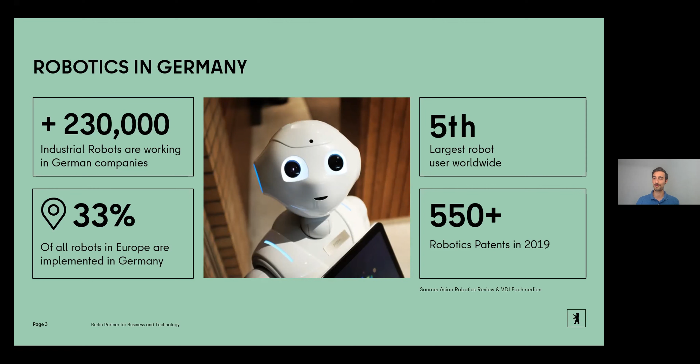So now I come to robotics in Berlin. We have three main topics addressed by the local actors: industrial robotics and automation, the care industry, and we are very strong in software and machine learning. Overall, there are around 60 robotic companies in Berlin, real robotic companies, and this number excludes all sensor providers or companies that produce parts for robotic companies.

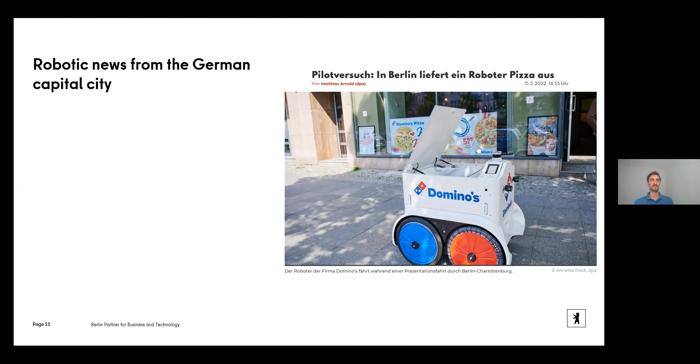So this is my last slide. I want to end with some news from the capital region in Berlin. This is a cooperation between Domino's and a Berlin company called Teraki. They started delivering pizza with a robot. And another one, this is the cleaning agency of Berlin. They plan to use robots to clean parks.

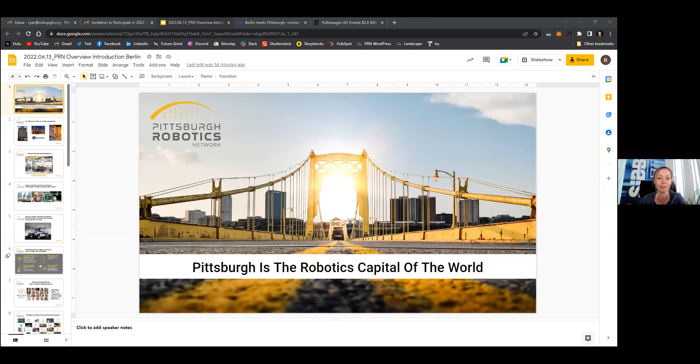Thank you, Jens, very much for this introduction to the ecosystem in Berlin. And now, to have a real conversation, we will invite Pittsburgh to make a similar or parallel presentation about the ecosystem in Pittsburgh. I read somewhere that Pittsburgh has a mission to be the global capital of robotics. So Ryan, can you tell us a bit more about this mission and how you want to achieve it? Ryan O'Shea from Pittsburgh Robotics Network, please go ahead.

Great. Thank you for the introduction. As was said, I am Ryan O'Shea. I'm the Communications and Engagement Manager for the Pittsburgh Robotics Network. We are a nonprofit organization that represents the interests of the robotics companies here in Pittsburgh, helping them commercialize their products, make connections around the country and around the world, and encourage companies outside of the Pittsburgh area to come here to see what's going on, to partner, invest and work here. There's so much to see about the Pittsburgh robotics ecosystem, and that's what I'll get into now.

See if I can advance here. All right, so just a quick background about why Pittsburgh. Pittsburgh has long been an industrial city, and it's long been a world-changing city. The first settlers from Europe came here in the mid to late 1700s because of the coal in the region. That eventually gave birth to the steel industry, which is what Pittsburgh was known for, the steel capital of the world. That industry was largely led by Andrew Carnegie, a Scottish immigrant who came to Pittsburgh and built one of the largest companies in the world here. And the steel made in Pittsburgh built buildings across America and around the world.

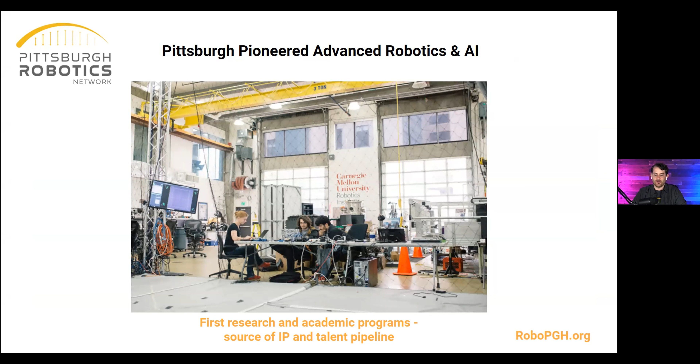And it didn't take long until that really was put into effect. 1979 was the Three Mile Island nuclear accident here in Pennsylvania, not far from Pittsburgh. And this is the birth of field robotics, when some of the students at Carnegie Mellon University used the robots that they were developing to clean up the waste and the accidents from this nuclear incident. So this was showing how robots can replace situations, keeping us safe and taking care of problems. That's something that's continuing till this day.

And Pittsburgh's no longer this great secret when it comes to robotics. This is what we are known for. We've grown from a steel city to a healthcare city, and now we are known as a robotics and AI city. And I think that's going to continue for quite a while. We have the infrastructure here. We have the foundations. We have the support from the work that's been done in the past, and that is driving industry forward today. We not only have the academic work that's happening at Carnegie Mellon University, the University of Pittsburgh, and other institutions in the area, but we have the commercialization. We are creating that pipeline from research and development to technology to the market.

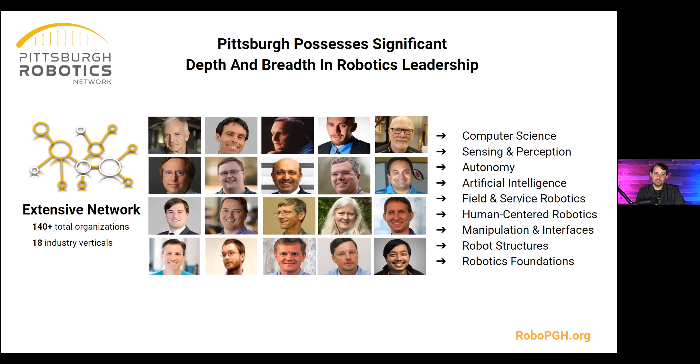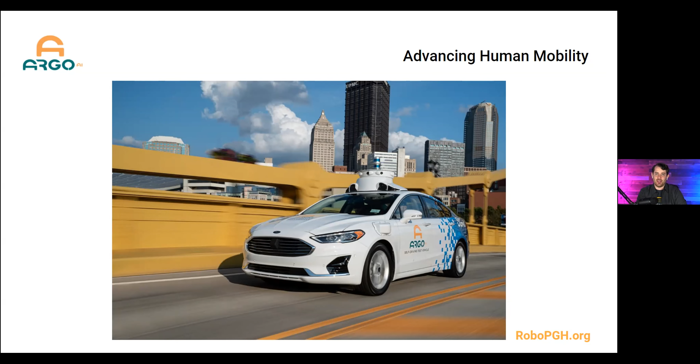And of course, autonomous vehicles are something that Pittsburgh is now associated with. This is Argo AI, a company founded by Bryan Salesky of Carnegie Mellon University, a world-leading self-driving company. And of course, they have a connection to Germany as well. Volkswagen has invested $2.6 billion into Argo AI in 2019. I believe this was $1 billion in money, and then 1.6 billion was the valuation of Volkswagen's autonomous vehicle center, with Argo AI's European headquarters. So this is some of the collaboration that we already see between Pittsburgh and German robotics companies.

And of course, they are on the streets testing there as well, just as they are in the United States. So I'll very quickly go through this because I know I'm short on time here, but some of the industries that Pittsburgh Robotics are working in are the supply chain, checking out retail inventory, palletizing and depalletizing. We are working with the supply chain overall in terms of logistics, getting things to where they need to go.

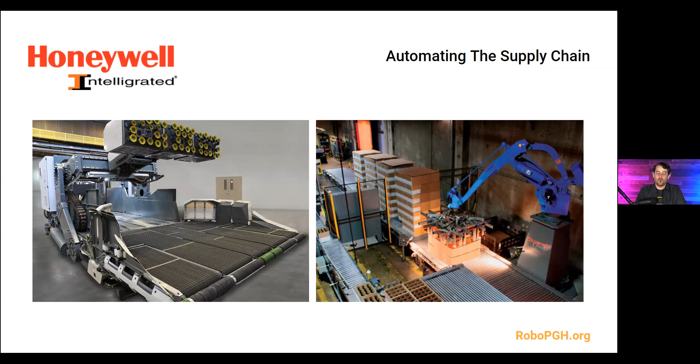FedEx Ground is headquartered here in Pittsburgh and is very interested in the robotics companies that are here who are pioneering in this space. Again, some more of that supply chain work with IAM Robotics. Astrobotic, again, is going to the moon. RE Squared Robotics was recently acquired in a $100 million deal by Sarcos. They make advanced robotic manipulators, so robotic arms, for many different applications.

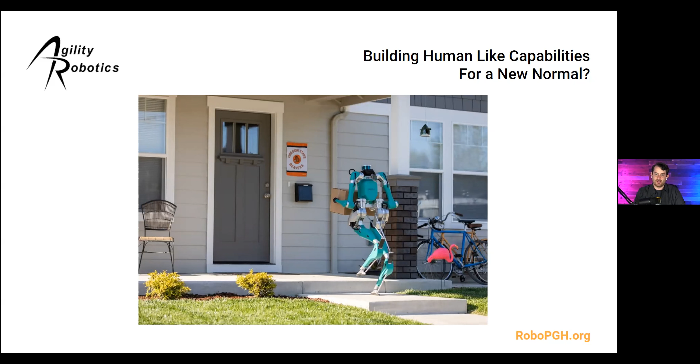And Agility Robotics, which makes a bipedal walking humanoid robot for warehouse and delivery here in Pittsburgh. What used to be steel mills are now robotics manufacturing centers here in Pittsburgh. And Kaarta is mastering 3D imaging and digital twin technology, and they're really pioneering this. So there is a lot going on in Pittsburgh.

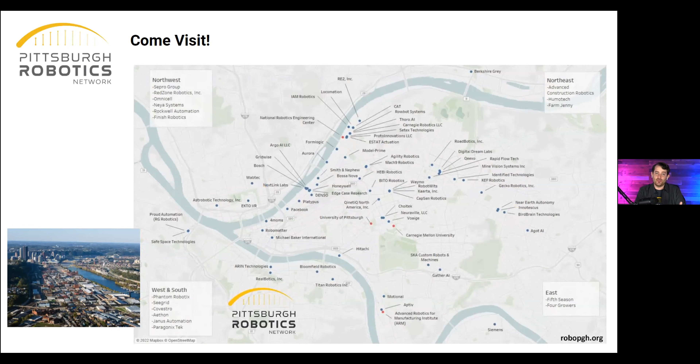I want this to be an invitation for you to come visit, see what's going on here. We have many robotics companies in densely packed areas, as you can see in this map, many of them in a very small 1 square mile area that people often call Robotics Row. This is all happening in Pittsburgh, and you should really come see it. We're happy to show you around. So thank you, and feel free to reach out with any questions.

Thank you very much. I'm sure there'll be a lot of discussion in the networking session and breakout rooms about the comparison and possibilities in Pittsburgh. And of course, in both ecosystems, very important partners and stakeholders of development of the robotic ecosystem are research institutes. And this time I would like to invite representatives who can tell us a bit how the development of robotics goes from the perspective of a research institute.

I'm sorry. I will give the floor to Matt Rosenberger from Advanced Robotics for Manufacturing.

All righty, thank you. It's great to hear from Jens and Ryan earlier. My only regret is that I wasn't part of the initial meeting with Berlin back in January, but very glad to be here now and to talk about what we're doing in Pittsburgh, and more on a national scope. So let me bring up my slides here.

Okay, so to give a bit of background about who the ARM Institute is, we are based in Pittsburgh, but what we're part of goes back a little further than our inception in 2017. We're part of an initiative that started in 2008, 2010, with a specific purpose to reshore and refortify US manufacturing. Our government partners, the DoD, Department of Commerce, Department of Energy, started to deploy institutes across the US to address manufacturing challenges in specific sectors and focuses.

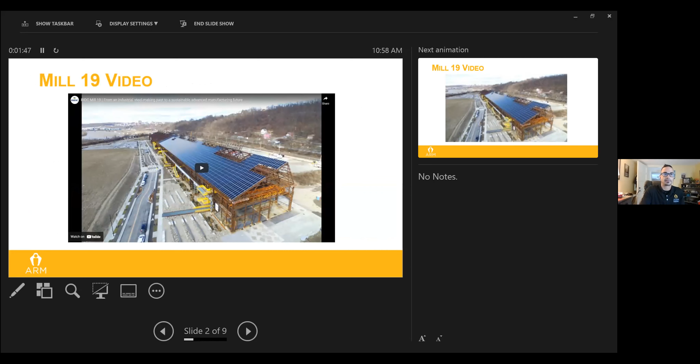Trying to share my audio here.

Scale and the size of the mill is something you just don't appreciate unless you're standing under it. And it's been here for almost 100 years, and it'll be here for another 100 years because that's the way we build stuff in Pittsburgh.

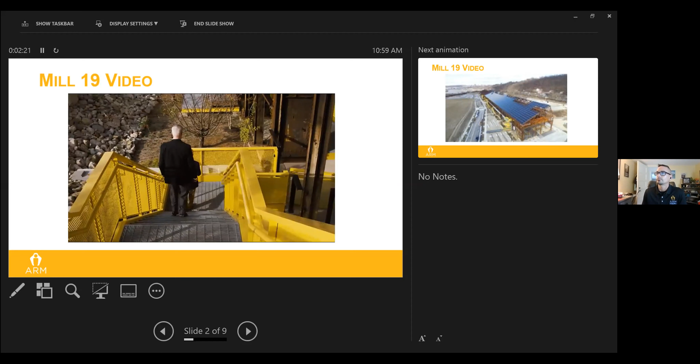Hazelwood Green is an amazing site, but it was a steel mill and a coke works, so there were environmental issues. They all had to be dealt with and resolved before you could go vertical with development. Here was this 1,500-foot long rusting metal structure that kind of was an eyesore, but also an icon. And so we were confronted with the challenge of how do we preserve the icon and turn it into something really positive on site.

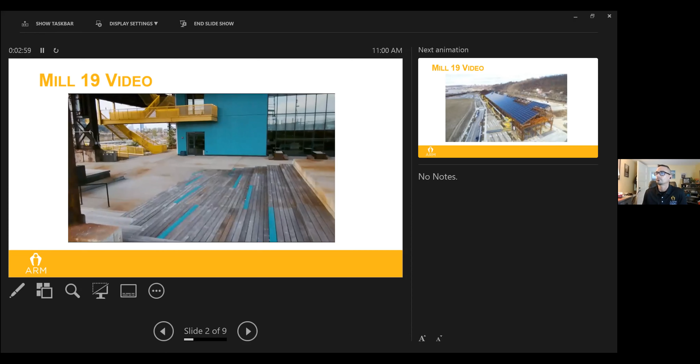MSR Architects out of Minneapolis, St. Paul provided an option that we didn't even think about, putting the buildings within the building, keeping the exoskeleton, and using that as a solar shed. The thought of putting solar panels across a quarter-mile long building, which is the largest sloped roof solar panel installation in the entire country, in and of itself presented a really tremendous opportunity for the foundation.

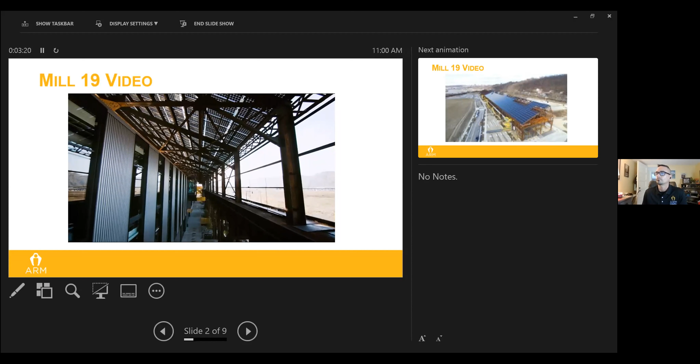It is generating power for the 2 buildings that are already built and will provide power to the 3rd building as well. All the stormwater from this site runs into a channel all along the length of the building. That water all flows into cisterns for gray water use.

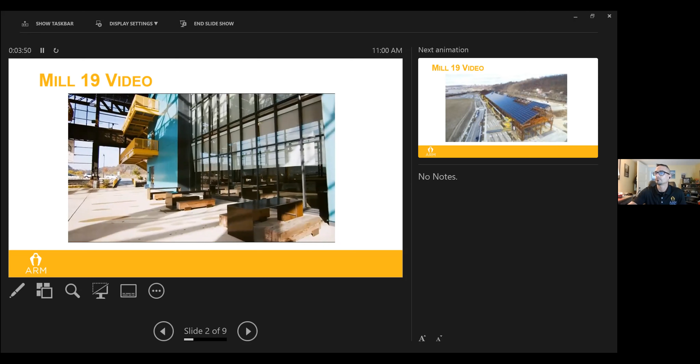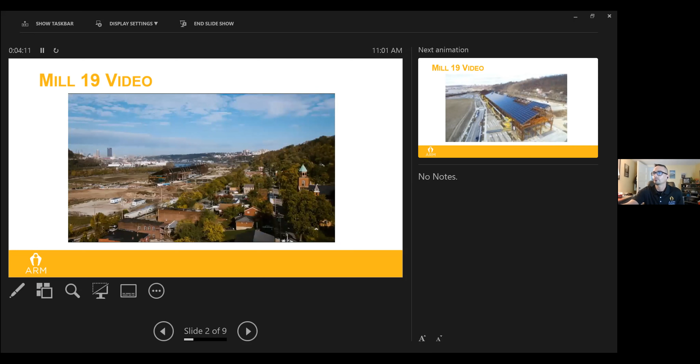One of our hallmarks is brownfield reclamation and redevelopment. Here in Hazelwood Green, Mill 19, we bring together the environmental remediation, the historic preservation, and the new cutting-edge companies and jobs. If you stand out here in an afternoon, you'll see the bald eagles swirling above the site. The resilience and rebuilding of Mill 19, integrated with the community, housing the new technology of the future, is really emblematic of Pittsburgh.

Okay, so that gives you an idea of our headquarters. We definitely invite you to, if you're in Pittsburgh, not only take the tour of the robotics scene, but also visit our Mill 19 headquarters. We share that space with Carnegie Mellon University, a local manufacturing extension partner called Catalyst Connection. And also, I think you saw in the video, our neighbors is a company called Motional, which is a Hyundai-owned autonomous car company.

So this particular site, there's a lot of development going on. There's commitments from University of Pittsburgh and the R.K. Mellon Foundation to put a BioForge Center, which would be a biomedical technology center. So again, expanding upon the industries, the healthcare industry, and also we're really trying to take the technology readiness levels from research to commercialization in one sort of setting in Pittsburgh.

Okay, so as I mentioned, we're part of this initiative called Manufacturing USA. It's now 16 institutes across the US. All of them have different focuses and scopes. There is a flexible hybrid electronics manufacturing institute, additives, lightweight materials, advanced composites, the list goes on. Most recently, there was a biomedical institute launching in San Antonio, Texas. That'll be the next institute coming from the Manufacturing USA.

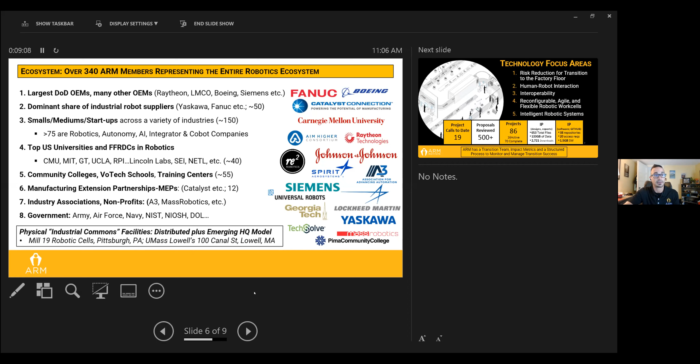And then certainly we have industry association partnerships like A3. We just attended recently the Automate 22 conference last week, and certainly government partners as well. Our technology focus areas, and we do call out 5 of them when we talk about conducting our project calls: risk reduction and safety to transition to the factory floor, human robot interaction, interoperability, reconfigurable, agile, flexible robotic work cells, and AI and intelligent robotic systems.

Those are our initial technology focus areas, although as time continues on and we are in our 5th year of operation, our priorities continue to change and we start to look more at AI and the intelligent systems and how they interact with the robots. We do conduct discovery workshops. We have working groups that we're launching this summer around some of the topics that we're talking about here, AI, human robot interaction, and more.

And the idea is to continue the conversation of those topics and create innovation, and really to help guide our project road mapping when we talk about funding opportunities. What do we continue to fund, and what industries and what challenges are out there that we can help address?

So as I mentioned, on the workforce side, we are doing a good bit of work. We've created a website called roboticscareer.org. We have also mapped out 26 competencies and job titles, including a robotic technician, an integrator, and a specialist. In that roboticscareer.org website, we've compiled over 14,000 programs nationally to help students find the right programs to get skilled in those different departments. We are adding different capabilities like job matching, where employers can pull from talent, as well as some AR, VR skill credentialing.

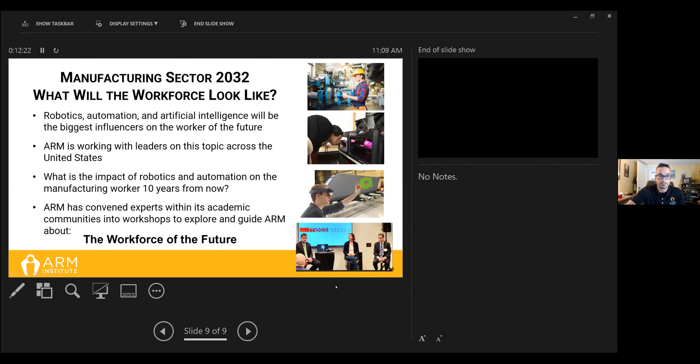If your company is interested in making an entry into the United States, or if you're already here, we would love to talk to you and see if we can be a resource for you in your journey for automation and robotics, as well as to connect you to our ecosystem of government and industry partners. All right, let me show that video real quick. And this one is about 2 minutes as well.

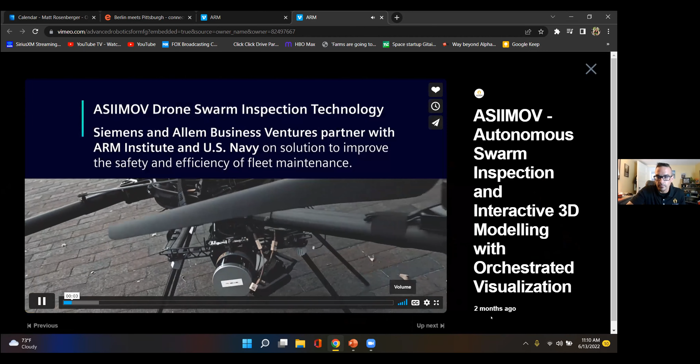Not getting any audio there. All right, I'm gonna have to skip that video because of lack of audio. Matt, we were getting the audio. Yeah, we hear you. Yeah, it was good with audio. Matt? Okay, maybe you can share it if you send the video to me. We could hear the audio. Maybe you wanna try again, Matt? Can you hear us? I'm sorry. Okay, yeah, go ahead. Yeah, so we could hear the audio from the film. Oh, you could? Okay, great. Let me try again. Okay. Alternatively, you can also share it with me later. But yeah, I think it's good to see it.

Perfect. Yeah, no, this will be a good demonstration of the type of projects that we're working with.

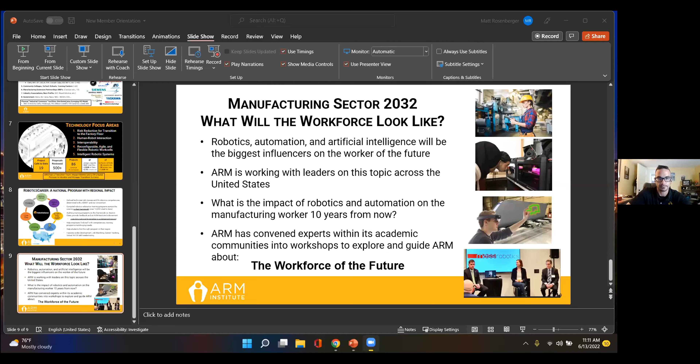Initially, we were looking at power plant inspections, long lines of piping and valves to where the drone can fly in, take immediate pictures and images, find if there's any leaks, and you don't want to get personnel into that area due to safety.

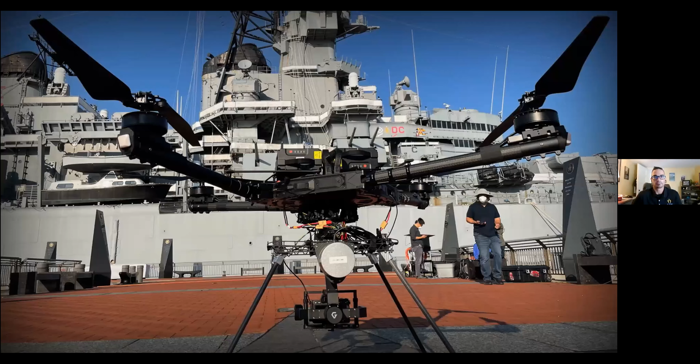The inspection would be autonomous. We put it in a shoebox, let's say, right? And we can fly outside of the shoebox. In an initial phase, we would assess what is this object inside the shoebox flying far away from the boundaries of the box. In a second stage, however, we need to get close. If we want to get high resolution imagery, we have to get really close.

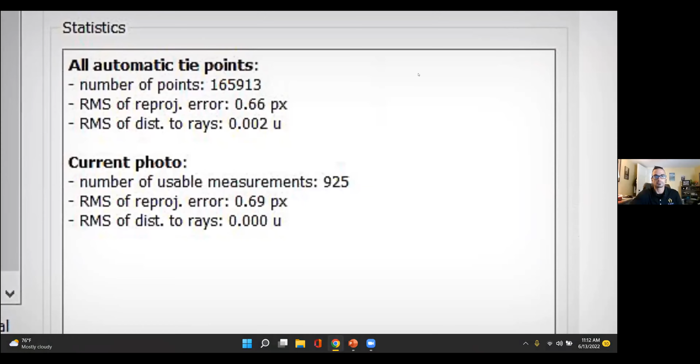Utilizing our modeling, simulation, and design software, we're able then to do a full check of the ship factory plant operation. ARM is focused specifically in robotics technology for manufacturing. So we're trying to make these processes more efficient and safer, as well as make sure that the DoD sustainment community is available in order to keep our country safe.

Working with ARM allows us to access startups and industry partners and academia. We're very excited about having this relationship. It's something that we've been part of for over 5 years, allowing us to do really impactful research, both for the industry and also for the Department of Defense. We're also looking at the industrial manufacturing capabilities that those technologies can produce, an advancement for the United States economy in the area of robotics and artificial intelligence.

My father served on the USS New Jersey in the Korean War. It's very interesting that I'm part of this particular project, giving back to our country in that capacity. The New Jersey still serves a role in our government in developing technology and serving our country.

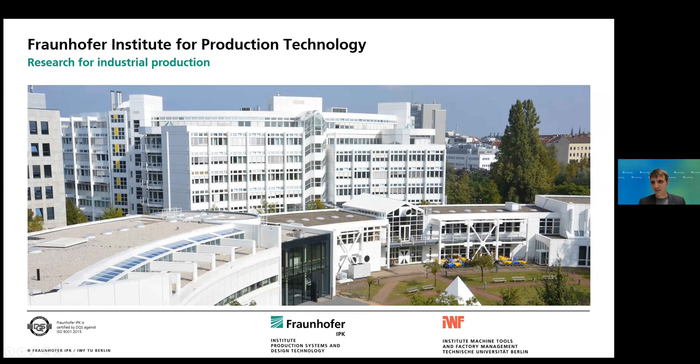So who is Fraunhofer? We are Germany's largest research organization, even Europe's largest research organization. We've got about 30,000 employees at 76 different locations all over Germany. And as you can see right now, we've even got offices all over the world. And the closest one is actually quite close to Pittsburgh. It's in East Lansing in Plymouth, which is about a 5 hours drive to Pittsburgh, as Google just told me. But they're not focused on robotics yet, but we are close by already. So we get in touch, I guess.

We are mostly focused on engineering and engineering science and other STEM related topics. So biology and math, as well as about 15 different institutes that just focus on production and assembly robotics.

And then we've got, yeah, going from here. It's quite a bit slow. Is my screen still sharing? Yes, but we still see, oh yeah, now it's the second next slide.

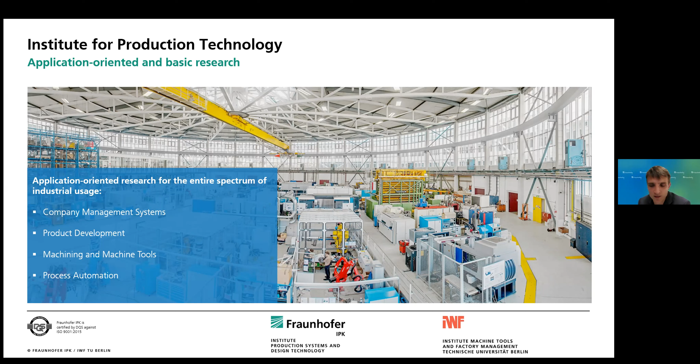So where did we start from? The very early robotics research at our institute was robot control systems. One of the earlier robot control systems for Siemens was actually developed together with my colleagues. Obviously, I'm a little bit too young to have been around at that time, but it started here, and we've been building on that legacy for the last 30 years.

So we went quite strongly into force torque control and human robot interaction even in the early 2000s, and we've built some of the first cobots that helped pick up large weights while still interacting with humans. So we started early in enabling easy assembly processes for large-scale manufacturing.

And then with the internet coming up, we started in automation as a service and other digitalization of the factory environment, Industry 4.0, which has been a strong topic for the last 10 years for our institute, where we focused on software development and flexible software solutions and integration of sensors as well.

And now we are focusing more and more on flexible robotics, which is the idea of dealing with uncertainty. As we start to see robots get employed in more and more different areas, everybody has to deal with uncertainty in the modeling, uncertainty and sensor noise, as well as just dealing with new and novel environments. So we can no longer build just rigid robots, as they do not meet the requirements of the industry, and they do not meet the requirements of different domains.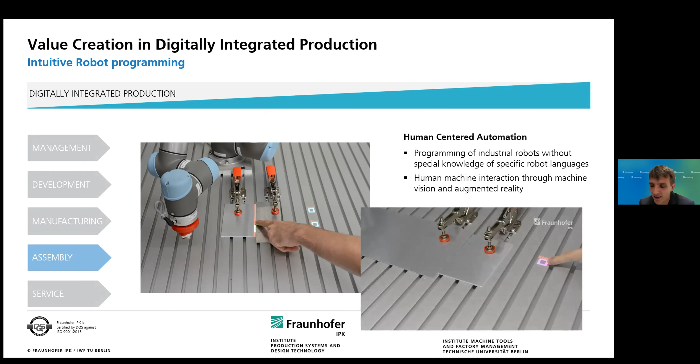And then we employ knowledge about the process. In this case, we are simulating a welding process to detect the objects, intermingle it with the human's intention, and automatically generate a program for the robot. And all that combined with an intuitive to use interface. In this case, we've been working on augmented reality.

And this has helped us in different applications in some recent industrial projects as well to solve pick and place processes as well as assembly processes such as screwing and screw driving.

And then we've got soft robotics, where we focus on active and passive interaction and support for human workers. So in this case, we are seeing an actuated jacket, which is supporting the worker and giving him some additional strength through pneumatic devices. It's not visible in the video, but it's audible if I would turn on the sound, that every time he's moving his arm, he's getting some extra boost from the pneumatic system.

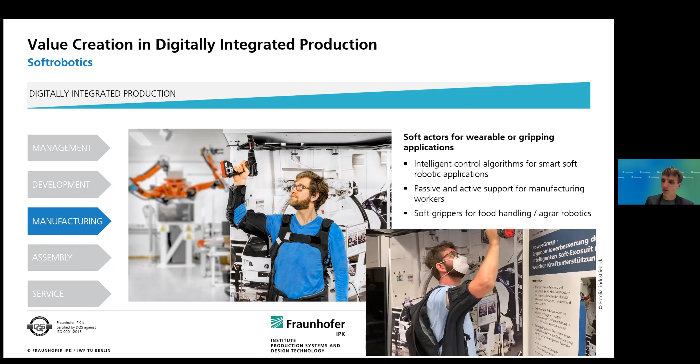And we're employing sensors and algorithms to not only detect the motion, but also reason about the intention of the user to only support him when he's actually needing the support and not block him or work against the user. And using the same pneumatic technology and the same soft materials, we're also building different grippers for food handling, for example. So if we think about handling tomatoes or cucumbers, they're easily damaged by state-of-the-art grippers, which is another topic when we think about using robots for more different domains and breaking the barriers of rigid assembly lines.

And lastly, we've got different aspects of human collaboration. This is building on our earlier works from the 2000s. So we are using robots and force torque sensing as well as intention recognition, which we can see in the video in the middle, to enable applications where the human is guiding the robot, even robots that are not built for human collaboration, robots that are way too strong, way too big for classic human collaboration robots.

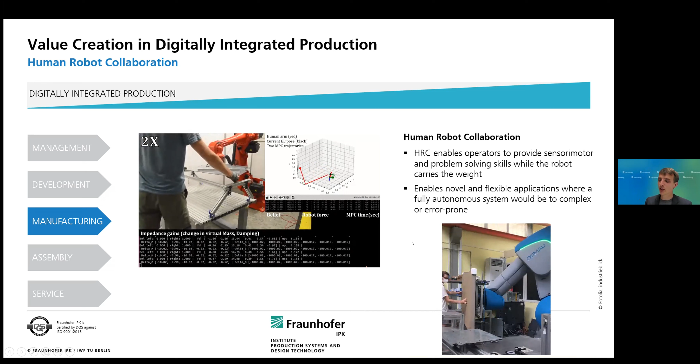So as we can see on the right, the robot's capable of lifting heavy goods. And while the video is sped up ×2, you can still see that the worker is still required to do some heavy work, which is due to limitations in the control theory, but still he's able to lift up a heavy piece without too much effort.

So what's our offer? We are a reliable partner for all your research endeavors when it comes to machining, assembly, and robotics applications, and we can help all of your companies with applications for public research funding. We can also help with consortium formation for private or even for public funding. And we also have experience in doing that nationally and internationally. So especially EU funding has been a long ongoing business for us. We also offer project management for research projects.

And obviously we also offer private contracted research where we could offer you automation potential analysis, where we apply all our research knowledge and help you figure out new ways to assemble your goods. But we also do feasibility studies for different aspects, for different ideas. We build prototypic applications, and we develop algorithms and software and test them in prototypic environments. So we're not a company looking to sell those algorithms directly, but we are building those prototypes. And we also offer workshops and trainings on robotics and AI if you're interested.

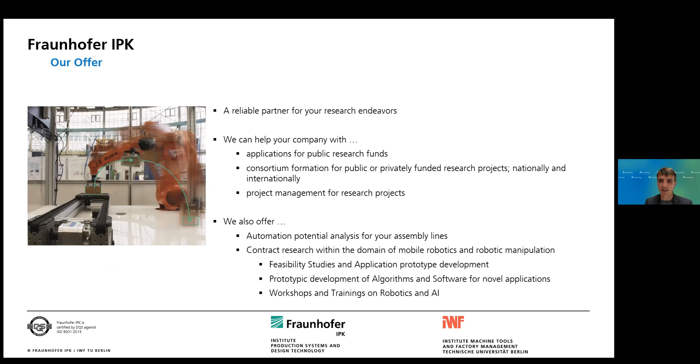Thank you very much. Of course, now after a good contribution from the research perspective, the overview wouldn't be complete if we wouldn't invite companies who are inventing different solutions. So we'll now have short pitches from the companies from both cities. I would invite first Matthias Krinke from pi4_robotics from Berlin to share some insights about your company. Yes, thank you very much.

pi4_robotics already exists 28 years, and we are specialized in robotics and machine vision applications. We are located exactly here in Berlin, and I'm also sitting here in this building. And we have 4 fields where we are offering applications specialized for the needs of this market. So this is factory automation, supermarket, which is robotics for retail, solar, which is quality inspection for solar cells and photovoltaic modules, and robotic application for life science.

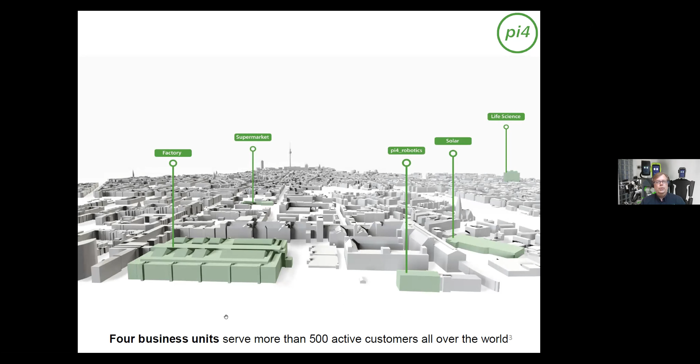I will show you some applications now in these 5 minutes, but first I will invite you to the entrance of pi4_robotics, where you can see one of our newest products. We just presented last year our Concierge Robot, who will take care of you if you come and visit us. And it is also possible to rent this robot via our partner company Robocene with a monthly salary.

So this robot is able to talk to you, to understand you to a certain extent, to recognize you, to compare your face with your passport. The robot knows when you have an appointment with me and shows you the way to the waiting room. So this is one of our newest products. What you see here is all that we do. We do the engineering, we do the production, and we sell and develop also components.

Let's have a look at the engineering department. These are the components and the development tools we're using. And what you see here is also that we developed our own cloud, which gives our machines the possibility to get automatic upgrades over the air and to inform us about the necessity for spare parts.

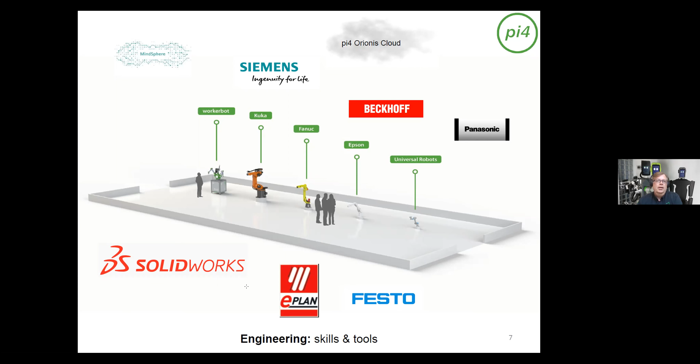And if our customers allow it, then the machines can automatically purchase the spare parts in our cloud, and we will deliver them directly to the customers.

For sure, we also have artificial intelligence, especially in our machine vision applications. We've been using neural networks for 20 years already, and now we have the possibility to connect all of our service robots with our cloud, where we have the neural networks running. And the good thing is that the robotic community is then able to use the knowledge of the whole pi4_robotics community.

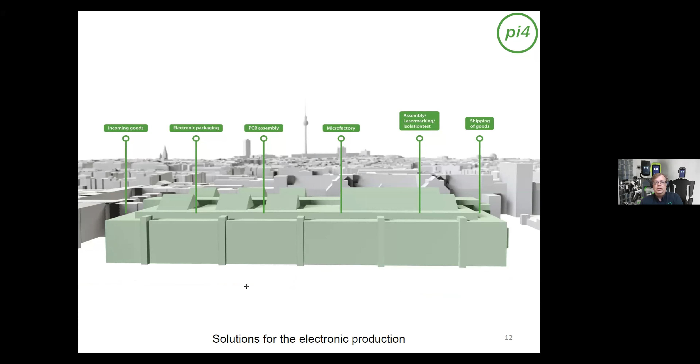So let us look at production and some applications we offer for factory automation. We specialize here in electronic manufacturing, and at the beginning we offer engineering support for the logistics part, especially also for mobile robotics. And if we go into electronic packaging, for example, we have developed assembly stations based on our WorkerBot 3. WorkerBot is the name for factory working robots we developed for special applications.

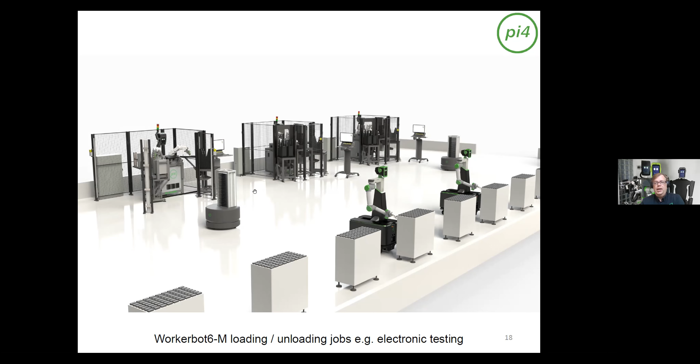So if you look here, you see a mobile WorkerBot 6, which is able to drive from one workplace to another, or a dual arm WorkerBot here inside the stations doing sorting or assembly applications. This one is not mobile because it's 250 kilograms, but it's flexible in that you can move it with a forklift to different places and use it there. The whole electronics, machine vision and everything you need is integrated in this platform. And there are different applications, like the ultrasonic welding application in this image.

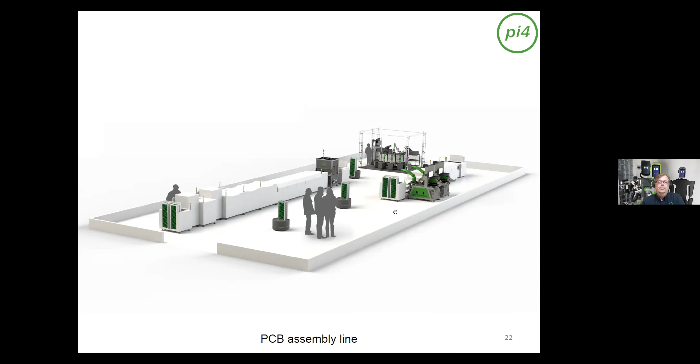And then if we look here at PCB assembly, you have a THD line where we have feeding robots. These robots are feeding THD electronic parts and placing them on the circuit board. Here we have a laser system for laser marking, and this is a robot doing in-circuit testing. So the robot is loading and unloading in-circuit testers.

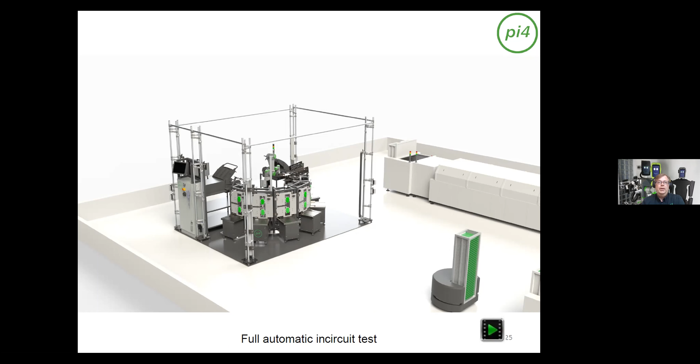It's a very open environment, so you can manually load and unload it, or you can bring the magazines here with a mobile robot to the system. So it's fenceless, but with optical safety fences.

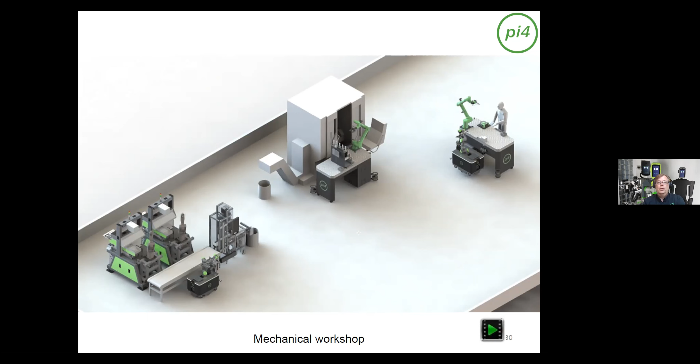And this is a machine tending application, also very flexible with integrated force feedback in the robot. The good thing about this application compared to others on the market is that you can just move it to the machine, and with the integrated force feedback it checks its position in relation to the machining system, so it's very easy to use for workers who have no robotics knowledge. You don't have to be a robotics specialist. You just move it there, press the start button, and the robot takes care of the positioning and starts work.

So just another point of view here on the collaborative work. This is also part of a research project at the moment, which we finish in the next 2 months, and then we can offer it to the market.

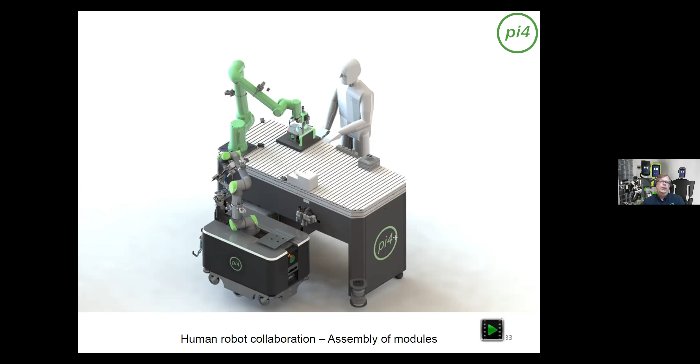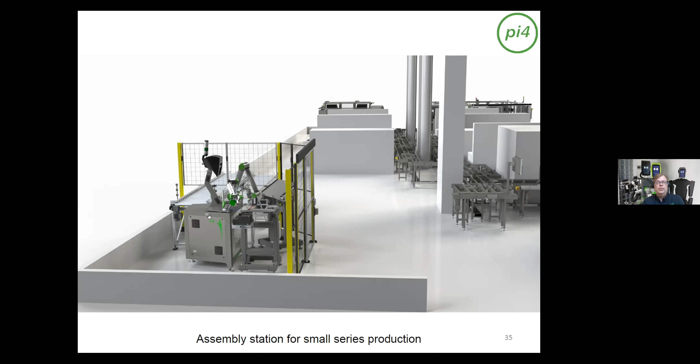So this is a conventional fully automatic line where we have automatic assembly, isolation tests, laser marking with a robot, and also a smaller assembly station based on our dual arm WorkerBot platform. As I mentioned before, we have everything integrated in here. And here, a configuration of 3 industrial robots where we also do assembly work. So that's classical factory automation with different styles of robotics.

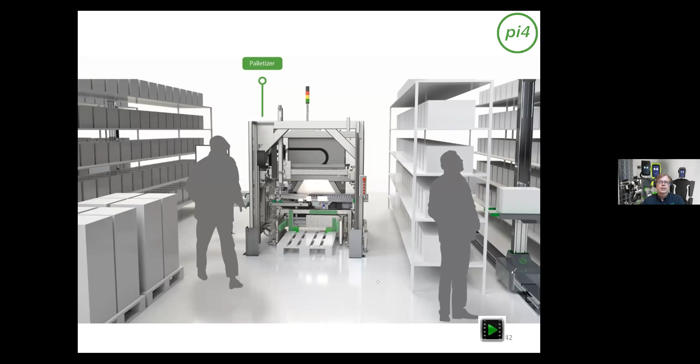And at the shipping part, we also have a palletizing robot, which is used, for example, at the German Bundesbank or minting companies all over the world. And let's have a look at a photovoltaic factory.

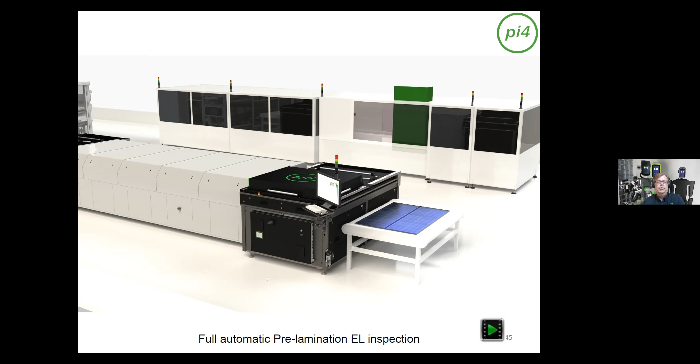The new version is also based on artificial intelligence if the customer allows us to connect it with our own cloud. So these systems are all over the planet, working from China to Canada to United States. We have installed the systems. And as you know from the situation now, it's a growing market also in Europe, and we have more and more factories now in this area also in Germany.

Let's have a look at the robotics for retail. We have here something which is called Workerbot Kiosk. You maybe remember, it looks like the microfactory I showed you before, but in this case, it's a small store where we can buy different products. Actually, since 2018, we are running one here in Berlin, and it's the smallest robotic factory of the planet because the dual arm robot is building little toy robots in 4 minutes.

Mr. Krinke, your microphone. Now you hear me okay? Again? Yes, thank you. Yes, we hear well.

Okay. So this is the smallest robotic factory here on the planet. You pay 12 euros and in 4 minutes, the dual arm robot, which is a WorkerBot for sure, is building little toy robots for you. And as you see here, we have a lot of new products for the robotics in retail. It's like also WorkerBot 6, who's taking care of the customers and serving coffee and other stuff.

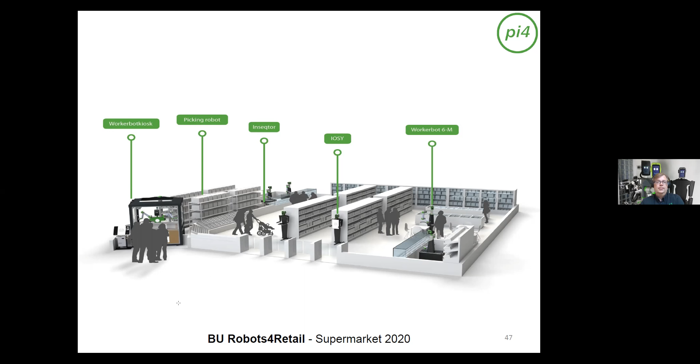We have marketing robots, and you can also have a larger storage for this little shop and behind with a picking robot. You can do also a pickup shop so that you can combine internet marketing and internet sale with this shop where you can just go there and pick up the stuff you bought in the internet.

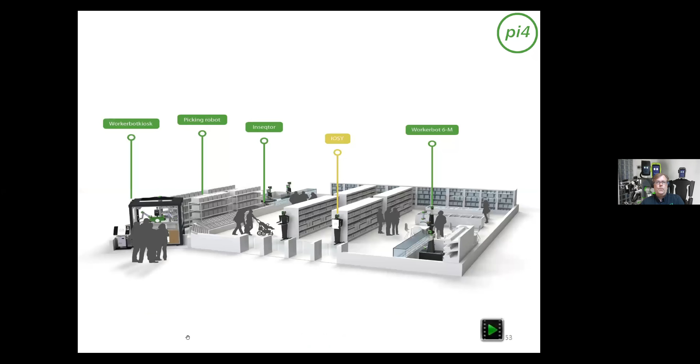Oh, I'm sorry, but just some more views of this here. Like a mobile robot, that was a prototype, at the moment it looks different. So you will see the new version in 6 months from us when we bring it to the market. This is our marketing robots. And again, the WorkerBot Kiosk, like a little shop.

And finally, we have a look at here a full automatic laboratory. We are producing this also for the identification of cancer and ALS diagnosis. Actually, at Penn State University, they're using also one of the systems in their laboratories. And it's also a patented system, especially for ALS diagnosis.

Well, our research partners think it's a very good tool to have the possibility to detect ALS as early as possible, which is in this kind of disease very important, that you recognize it at the early beginning of this disease.

We won a lot of prizes. The last was that we were Innovator of the Year 2021. And what you see here is also a robot from us. It's a DJ robot, and this robot is working on TUI Cruises ships since 2018. And finally, I just want to show you a very short video of the robot.

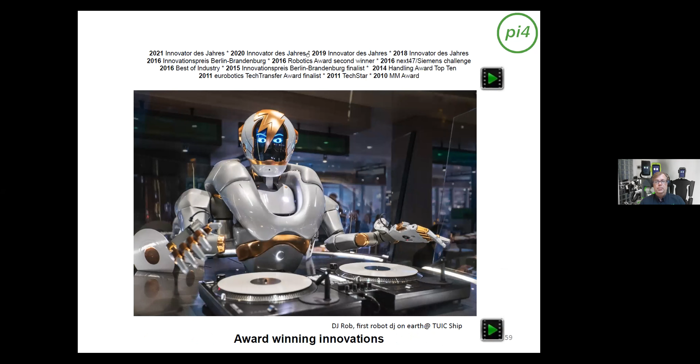I realized that the sound is not working, but I think it's not so important because I just show you the video. We have here two 6-axis arms. We have the possibility to move the head. We have in the head a camera system to detect the people. We have a possibility that the computer interprets the music and the robot moves according to the music.

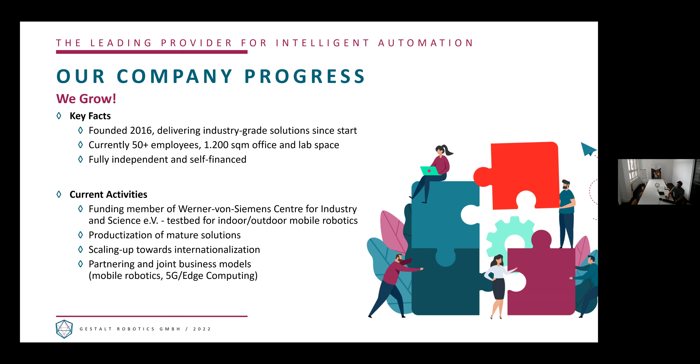We are fully independent and self-financed, and from the Berlin ecosystem on robotics, you may have heard of the Werner von Siemens Center here before. We are one of the founding members of the Werner von Siemens Center, and just recently built up a testbed there, a 5G testbed for indoor and outdoor robotics. So that's a great opportunity also over there to work together with our partners. And one could also say that we are an alumni of the Fraunhofer IPK, more or less. So when we started in 2016, we were located for half a year at the institute there with support from the professor. So that was a big help at this time.

So, but what are we basically doing? I already told you we are working on solutions, and our value add is mainly software. So we are based on a technology portfolio that is mostly control and computer vision functions. And based on the specific demands of our customers, we are then putting those functions together, building also typically distributed automation solutions, so involving cloud and edge. We have been involved in one of the first campus network projects in 2018 here in Germany with Deutsche Telekom. And we also had a background in classic computer vision in automation technology. And we knew all the struggles and issues that we had in the past. And we saw this potential, especially of deep learning here, quite early in the beginning.

And we're dealing with making deep learning industry grade since 2016, with a lot of experience with a lot of tech and tools there, and especially one technology, a few-shot learning technology that enables industrial customers to work with machine learning and the resulting good performance without the need for massive data sets, for example.

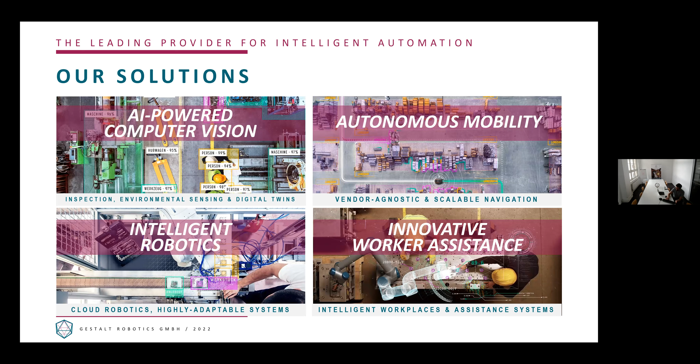And the project that I'm now going to present is somehow at the intersection of AI-powered computer vision, autonomous mobility, so mobile robots are involved, and also intelligent robotics. So we are talking here also about mobile manipulation and also worker assistance. So it's at the intersection of more or less all topics. But let me start with a short video of the preliminary project that was a proof of concept that we finished at the end of 2020, during the pandemic.

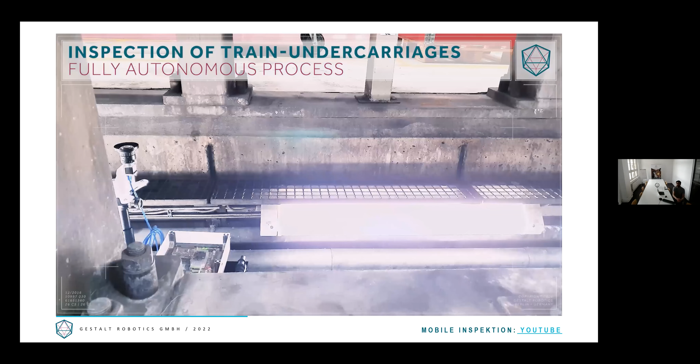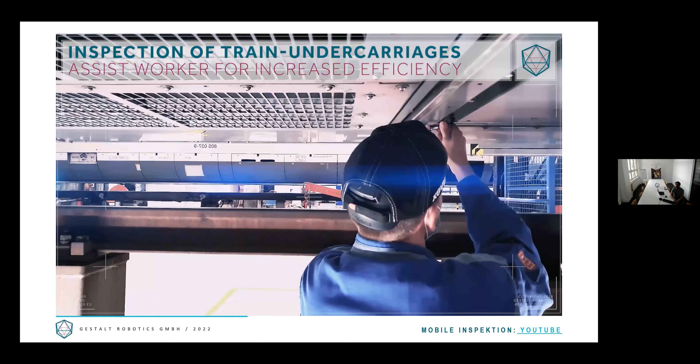And within this POC, we showed that with the help of a specific mobile robotic hardware that was developed by a company from Britain, and our part was the software and all vision in this case, we proved that you can reliably do inspection tasks, in this case under the train with this special robot, and you can do it on a human-like level, or even better. And this POC project was a great success and was implemented in quite a quick time. I think it was a 2-month project, and then there was a bigger tender for this project called eCheck, which is dealing with automatic inspection and maintenance at 5 different locations in Germany.

So the big issue in Germany is the train traffic should double during the next years, but what could not double are the inspection facilities for the trains and the personnel that Deutsche Bahn here in Germany has. So there's a massive need for automation and for support here in train inspection.

And even when you had the opportunity to go with these nice high-speed trains here in Germany, you know that they are typically delayed, and maybe that's also one issue we can solve with this project.

So we actually won this tender together with a company called Götting, building autonomous mobile robots. So they are building the hardware for mobile robots, and the Strama MPS, which is actually one of the biggest special purpose mechanical engineering companies here in Germany. So we are responsible for all the software part and the sensor systems. We have Strama with the general mechanical engineering, and Götting with specific AGVs or AMRs. So what are we building in this project?

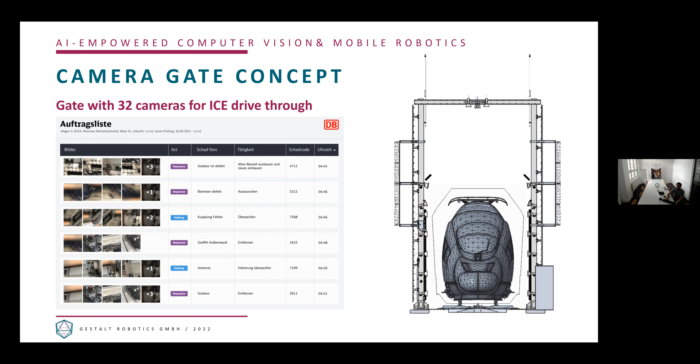And then the result is that you would have the inspection results when the train finally enters the inspection facilities, and then the workers just get a tablet app and get a virtual model of the train, and at the virtual model it's marked where our system found these kinds of errors. So this is also support for the workers. They could go more directly to the parts of the train where issues have been detected and not have to walk the full distance of the train and look for everything.

So there are also parts of the train where the camera gate could not really look into. So for this purpose, there are mobile robots also going next to the trains equipped with cameras. So arms here, for example, that can go under the trains with their flexibility in the movement and guiding the cameras.

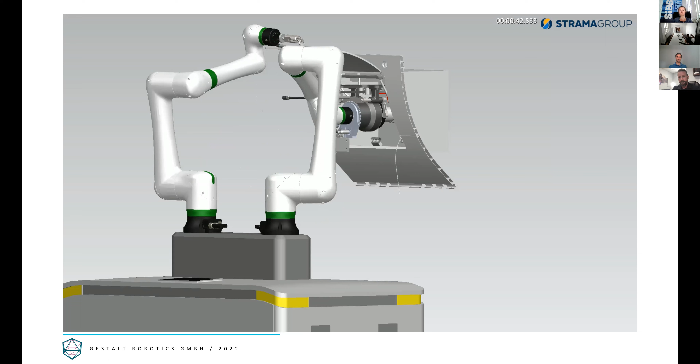And the last addition is the maintenance. So what is also done in this project is releasing and the input of the water supply of these trains, with these AMRs specifically designed for this project with two FANUC arms on it, and everything is quite flexible. So one robot has a camera. The camera helps the robot to find the hatch here. One is holding the hatch, and the other one is responsible for releasing the water and then for the new water input here. So that's quite challenging.

We are currently in the implementation phase already. The camera gates are currently installed at different locations, and we are already working on the mobile robotics applications from this eCheck project. So that was a little introduction of our eCheck project.

I close with also some remarks on our customers and partners. So we are mainly working for logistics and production, but also have partners in the mobility domain, for example, where we provide assistance systems, for example, for the new subways here in Berlin. And we have a strong network here in Germany and in Europe with integration partners, but also with research partners. And one of the research partners, of course, is the Fraunhofer IPK here.

So thank you very much for this little introduction of our eCheck use case. And of course, I'm also looking forward to the further discussions here. Thank you very much.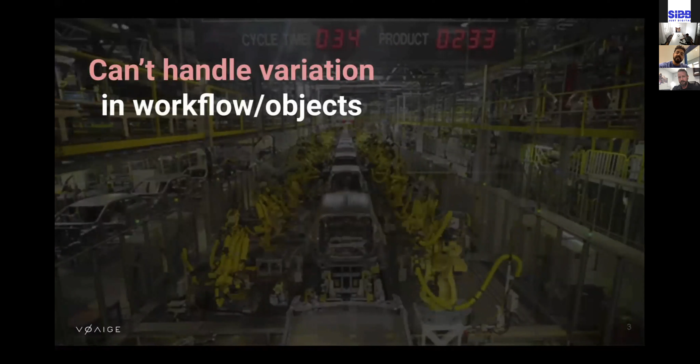However, if you looked at the future, what challenges remain, as a lot of these other companies were amazingly talking about, there's this difficulty in handling variation in workflow, which is what task you want to do and where do you want to do it. And also objects, like what object you want to manipulate while doing that task. Second, you can't really move these work cells around on the fly while handling complex objects. And finally, you cannot reprogram these things on the fly as well.

Why is this a need? Because 90% of US manufacturing, at least, are SMBs, small to mid-sized companies. And even some of the large companies have smaller locations. You need robotic work cells which are compact as well, which have flexibility in being applied to different tasks. So what we're trying to do at Voaige is building vision-based, reprogrammable operating AI software.

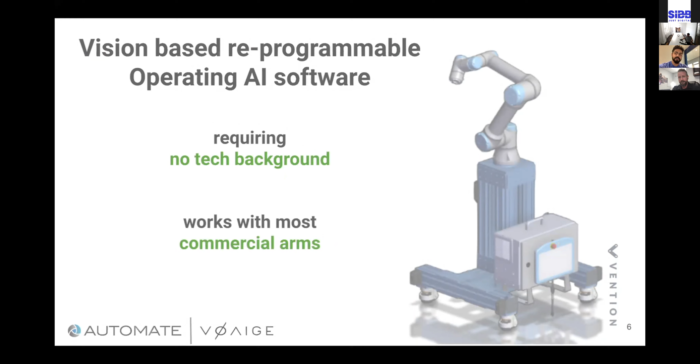And so why are we trying to do this? We're trying to do this to handle workflow and object variation while being movable and relocatable. Now, I understand that workflow variation is a huge can of worms, but we are starting with simpler tasks like pick and place, sure. But we want to solve that in a way that you can really attack most objects while making the work cell relocatable on the fly. And then most people without any technical background can reprogram all this, and it works with most commercial arms that we've actually tried.

So what is our actual product? What are we actually building? We're building the eyes and the brain for your arm. So our system basically comes as a package with a gaming PC and basically Intel RealSense sensors. That's it. So we include the vision sensors. Our system comes with pre-installed AI software and a UX that's custom as well, that we spent a bunch of R&D on. And finally, it can power any movable work cell.

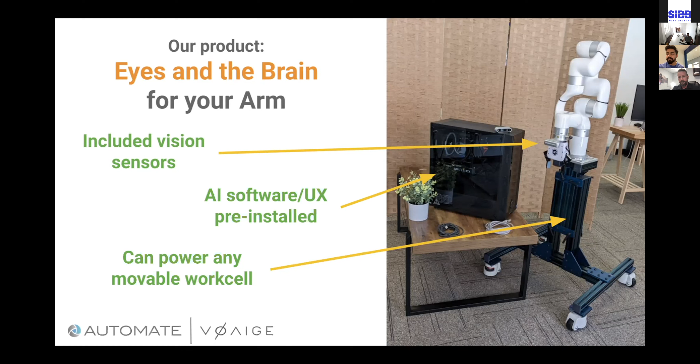And all you need to do is stick the camera, if you want, with double-sided tape, sure. But we recommend screwing it in. You just stick the camera and you connect the Ethernet cable and you're done. You have AI-powered most robots out there already, and we can retrofit solutions, our work cells as well. So that's what our system looks like. Now let's see it in action, and our system is called Deep Space at the moment.

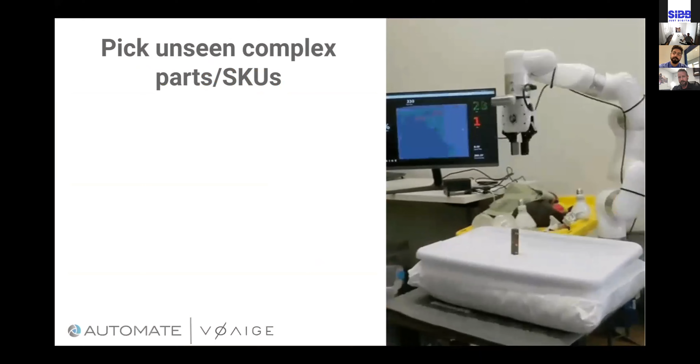So we can pick complex parts and SKUs, and most of these objects that you're seeing in this video right now have never been seen before. Deformables are okay as well. Whenever it fails, it tries again in a different manner, which hopefully leads to a success. And we can scale to thousands of parts and SKUs seamlessly. We do not really need CAD models to work with. As you can see, it failed and then tried again in a different manner.

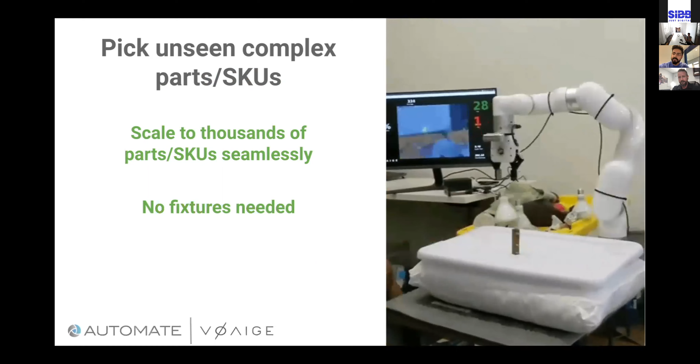So the other cool thing about our tech is that we don't really need any fixtures. So just end effector camera-based solutions. So you can move the robotic work cell around very easily. And you can handle deformables, which has been challenging for the community, but I do see some solutions out there as well, which are very cool, by the way. But deformables in general have been interesting and challenging to handle.

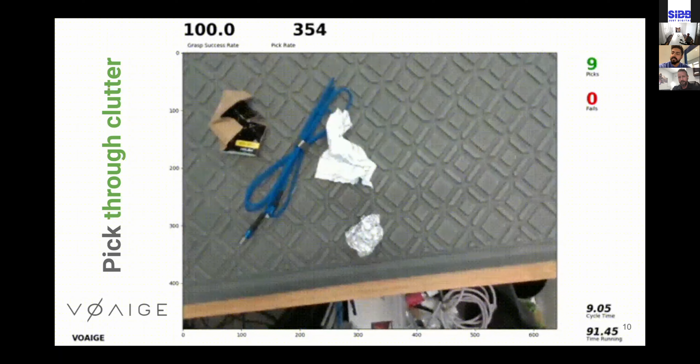So we also pick through clutter. I apologize if the screen is lagging, but the idea is to show that we can literally pick up most trash objects that we see. Don't really need any structure to them. None of these objects have been trained on. All of them have been seen for the first time. And as you can see, wires, screwdrivers, pieces of paper, caps, deformables.

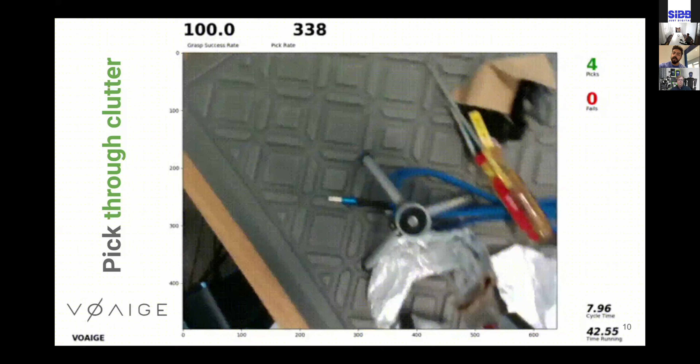We have a pick rate of 350, however, that is limited by the robotic hardware. So what we're building is the software to power any robotic arm. If you have a faster robot, our software speed can scale up with that robot.

So that's a key thing to keep in mind. We have only tried on these cheaper robots because that's what we can afford internally at the moment. We can also pick complex parts in dynamically changing conditions, where we do a top-down pick and do a sideways pick as we move. And that lets us sort of handle these different cases where you need to, on the fly, reprogram a shelf pick while you try to do some packing or a pick and place from a bin.

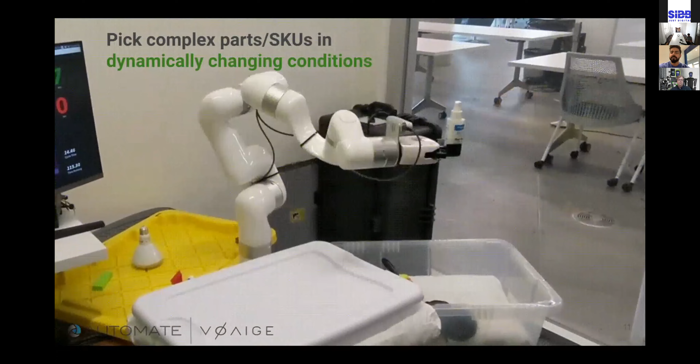So our tech is developed in a more flexible manner, which lets us handle those different use cases, hopefully providing more value than other solutions. And finally, we also let you move and adapt on the fly. So if you have a robot right here, you can move the entire work cell while doing complex pick. Of course, this is not an AMR, but you can imagine this being on an AMR while handling these unseen, complicated items and objects, basically.

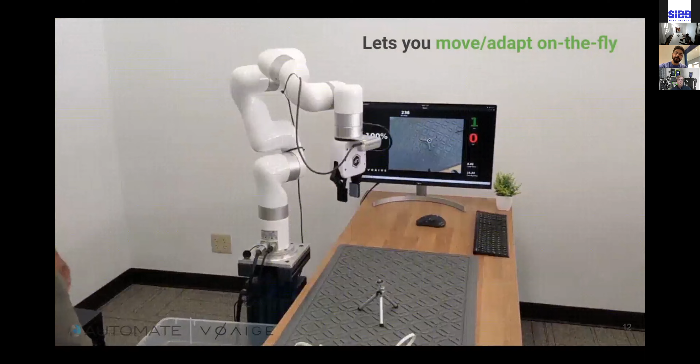So this overall shows you how flexible our vision system is. And remember, all of this is enabled, we are independent of the arm. It's enabled only with a vision sensor that we send you, and we basically send you a PC with all of the software integrated with it. So in a nutshell, we are sort of an operating AI system for a robot. And then we can retrofit cobots that are already out there, or we can help you deploy new work cells. So that depends upon what stage of automation you are in specifically.

So how do we fit into the market right now? We feel like we actually add value to a lot of stakeholders. We have systems integrators. We can work with our original OEMs, basically. So in fact, all this is actually happening as we speak. Of course, we work with end user companies and AMRs. We let them address more interesting challenges and projects. So we have aligned interest with most, if not all, of these stakeholders in the market right now. Since we don't really build hardware, we need to partner with hardware companies to provide these solutions to the market.

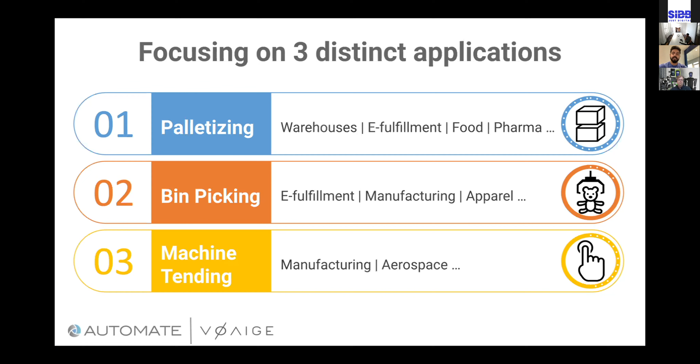And so we are currently focusing on 3 different applications for the summer. We will have a productized deployment by end of summer, basically on palletizing, mixed case palletizing, I must say, complex bin picking while being reprogrammable, and machine tending again while being reprogrammable, not needing CAD models for these tasks. So all these tasks enabled only by a vision system and a computer, to power most cobots and industrial robots, while being reprogrammable by a non-technical person on the fly. And that makes our system quite flexible. That's our aim here.

And we are a small team right now. We're 3 people. Myself, my name is Tapan Pal, and I'm the founder CEO, and also serve as a research scientist. We have Ajmal and Vignesh serving as senior software engineer and business development. All of these guys are from Carnegie Mellon and Ross School of Business. So we have a large team of interns and part-time as well to support any kind of project you guys might have. And so overall, we're just looking to see if this sticks, if this is useful. I'm looking for pilot projects to just see whether we can help any other stakeholder in their project.

So quickly to recap, we're building the advanced and easy to use operating AI for robots. And if you have to just remember 3 things for us, we are reprogrammable, we are movable, and we can pick complex unseen parts, SKUs, and objects.